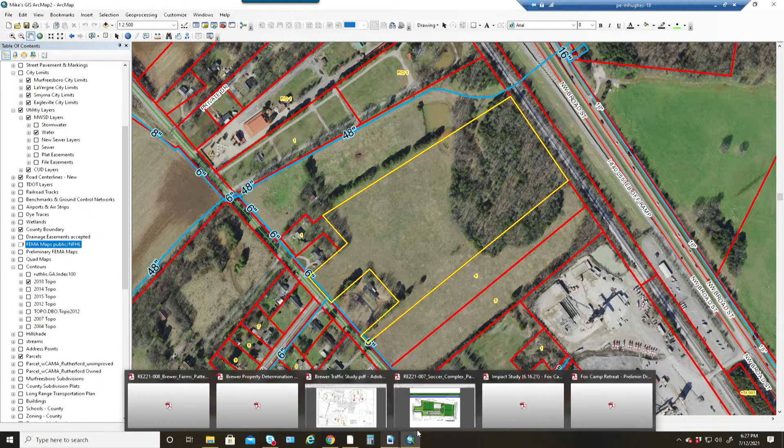The applicant, since that meeting, has shifted the use a little bit more to the northwest. The property is actually broken into several different 5-acre tracts, and instead of taking the two they had originally, they took the one to the northwest along with one of the original ones they were asking for.

So it's actually shifted just a little bit to the northwest versus what they were asking for to the Board of Zoning Appeals back in February of this year. The applicant's pattern book is on your iPads, and the applicant's representative, Mr. Clyde Roundtree, is present to make a presentation on this, but I'll just go over some of the high points.

The soccer club currently operates out of a structure at Oakland High School. The hours of operation will be 10 a.m. to 9 p.m. on weekdays, 8 a.m. to 10 p.m. on weekends during the warmer months. Colder months would entail usage of the indoor facility only, but the operating hours would be the same.

The size of the facility that they're proposing to build would be about 45,000 square feet. That's a little different than what's in your staff report. That's changed a little bit since we got the revisions to the pattern book that is on your iPads right now.

There are 2 outdoor fields. One would be in front of the building. When you look at the concept plan that Mike has up there on the screen, you can see one behind the building as well. The one behind the building is proposed to have lights at some point. The one in front, they're not proposing any lighting on that particular field.

Access to the property would be from Old Nashville Highway. Of course, any new or modified egress points would need to be approved by the county's highway department, and also they'd have to submit a site plan showing that the site met county requirements. No traffic study has been done on this currently. That is something that we can require even prior to site plan.

But you can see they are proposing a dust-free parking area of 92 spots with a grass overflow area of approximately 52 more. We've asked for some information on just the number of seats that would be available inside the facility and outside, and I think Mr. Roundtree is going to discuss that a little more when he comes up here.

Let's see what else we got here. They would be required to install a Type 2 buffer adjacent to any residentially zoned property. This is a PUD, and it's surrounded primarily by commercial zoning. There is some residential zoning along Old Nashville Highway. Mike's going to turn that on. You can see that those portions there weren't part of the original request, obviously, because they're separate pieces of property.

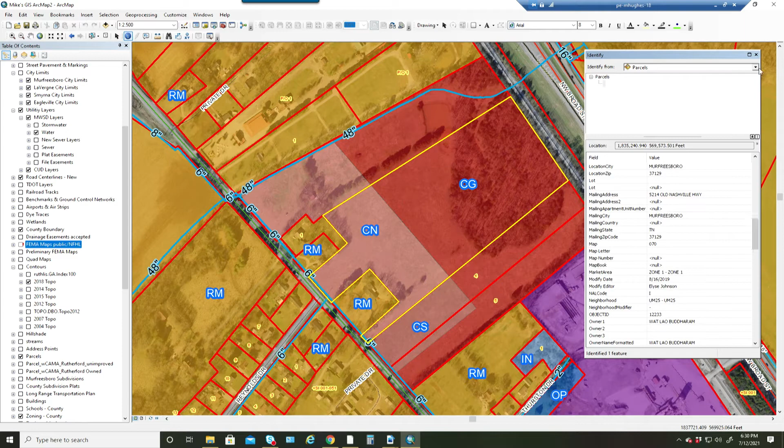But with that, I'll be happy to answer any questions that the commission may have before the public hearing's opened. Any questions for staff at this time?

Applicant available? Applicant here?

Just go ahead and start hitting this.

Chairman Phillips, Commissioners, my name is Clyde Roundtree with Huddleston-Steele Engineering. I'm accompanied by Mr. Ben Livingston, who is the representative for the client, and I believe Jorge is here as well. Thank you, Jorge. Again, my name is Clyde Roundtree, Huddleston-Steele Engineering, and I'd like to thank you for the opportunity to present to you the soccer club located on Old Nashville Highway.

As was mentioned, we originally took this project through to the BZA just to get a special use exception for the property. After going through that process, one of the things that resonated with the BZA was that they were just not confident that if the soccer club was not successful, it would turn into another use. That's where we went into the plan development route, because we realized a plan development provides assurances for adjacent property owners, as well as the county, in knowing what that land will be used for. Mr. Lopez was more than willing to go through that process. He believes this piece of property is really suitable for his business, and he's excited about the possibility.

We'd like to thank Mr. Don Bruce, who's the owner of the property. He's been very flexible. As Doug mentioned, we originally had two parcels to the eastern portion of the property. We shifted to the western portion of the property. That allowed some better access to the property, further away from the adjacent residences, and it just worked out well, and it allowed us to get away from surrounding properties.

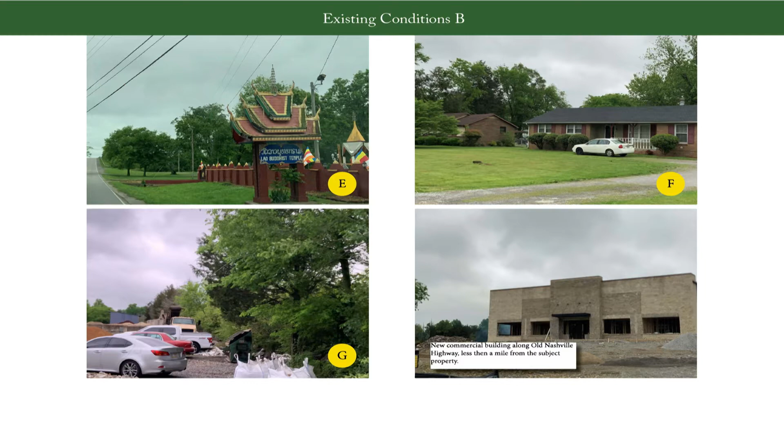From the site plan standpoint, several things have occurred. The driveway now is sandwiched between the properties. Before, it was basically running very close to the adjacent property. We lined it up with the street across from our development, so it's still justified towards the left side, but it is in a wide green space, as well as the signs located in that green space.

As far as the overall development, there's an indoor facility. We justified that against the property line where the temple is, trusting that will provide some buffering from the parking. So any light associated with the parking lots could be buffered from the temple with the building itself.

As far as the front field, a lot of the soccer, basically they flip the field and kids can play on the smaller sides, and they have a lot of different ways of playing soccer on an existing field. So the two fields are outdoor fields with one indoor facility field.

Now, the field in the back, if it prospers at this location, our owner would like to have the ability at this point to have lights approved for the rear field. The reason for the rear field is they don't have that much demand for nighttime soccer, but also to pull it as far away as possible from the existing residences along Old Nashville Highway.

The parking lot design - basically the dust-free parking is closest to the building, but also furthest away from the residences. And there is opportunity where they need overflow parking. We have 92 spaces that are dust-free, and then another 52 spaces for overflow.

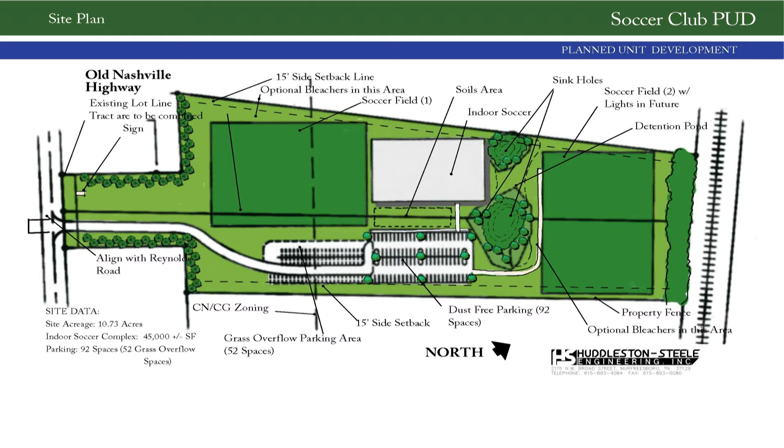The last slide just shows the facility itself. Now, we call it a club because this is a group of people who play soccer together, their families play soccer together. This is not an open-for-public, drive-up kind of facility. Everyone who uses the facility is associated with the facility. It's a pay-per-use type of facility, not a general play where you just come, pick up a ball, and let's go.

It will be a fenced-in facility. For someone to use it, they have to coordinate with the ownership of the property. So we want to make sure it's understood that this is not a public piece of property. This is a private soccer club that's invite-only, a day-use pay kind of facility.

Part of the concern was with any kind of park, what kind of situations will occur - will riffraff come in, all those kinds of questions. This will be a gated facility, only open during times where owners are present. It'll be monitored, it'll be fenced. So all those safeguards are designed to protect the investment of the club's soccer fields, but also to give maximum opportunity to manage the property well.

So with that, Ben, if you'd like to come up and share about the actual use of the property, we'd appreciate that.

Clyde, before you leave, could you talk a little bit about the water and fire protection situation out there we just found out about? Yes, one of the questions that came up was capacity for the water flow of the building, whether we'd have to have a sprinkled building or not, and we'll have to have a sprinkler-based building based on the flows that are available to us. We feel like the fire flow will be sufficient, but it will be a sprinkler building. We just found that out.

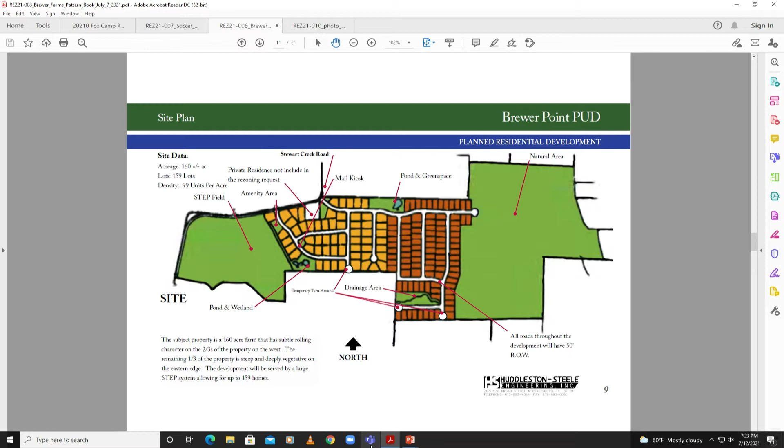Buffering and screening is not required by the zoning ordinance between single-family developments. I believe Mr. Roundtree, when he makes his presentation briefly, will note the revised pattern book does call for a small buffer along one of the sides, but I'll let him discuss that in more detail.

Performance standards would not necessarily apply to this because this is a residential development, not a commercial one. With that being said, this particular application does propose to leave about 38% of this property undeveloped. About 40% of the lot will be the large lots, which are 15,000 square feet, the minimum required in current zoning. The remainder will be just a shade less than that.

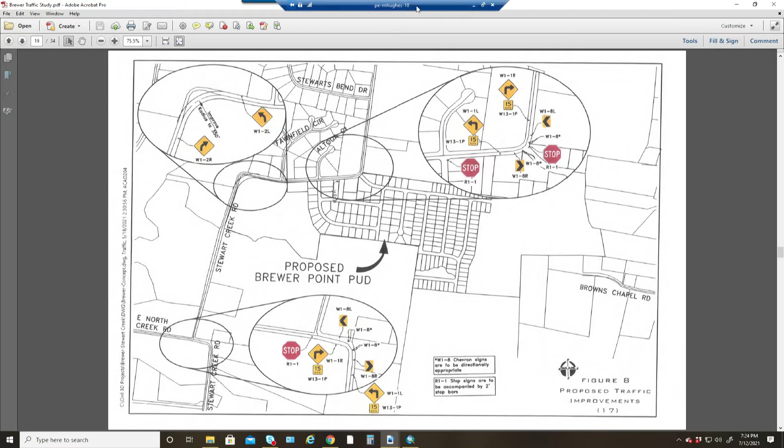No, Doug pretty much covered it. When we met with the design team, we told them we've got some areas we'd like them to look at, and they've looked at each one. The traffic study, even though it didn't say it needed a turn lane on the westernmost entrance, they're proposing to add one at that location. So you would have left turn lanes for the development, but also to Altoga Court, if I'm saying that correctly.

Only other thing I'd point out is there are a couple lots just a little bit east of the westernmost entrance that are fronting Stewart's Creek Road, and anytime we can eliminate potential connection points is a good thing. So I would ask if they could maybe move those to the inside of the development, maybe close to this pond and green space area, moving those off the main thoroughfare out there.

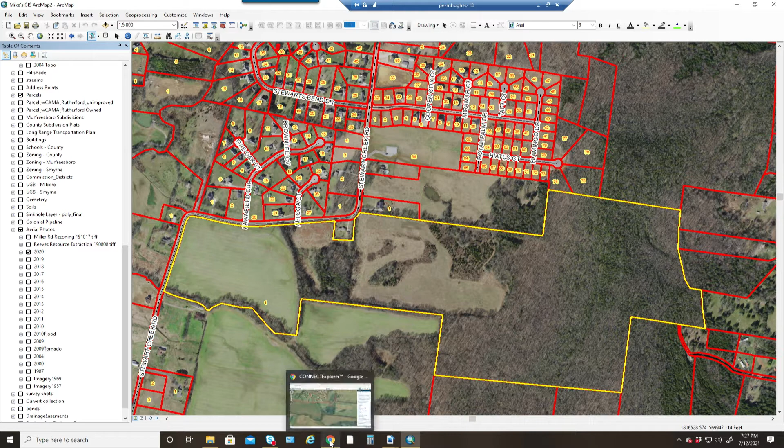But all in all, with the large lots up front, the layout, and preserving the steep areas on the eastern end, that field will pretty much stay a field from here on out once the STEP system is constructed. We will see a preliminary plan, we'll see construction drawings, so there's a lot of steps involved after, if and when it does proceed to this body.

Any questions for staff at this time? The applicant is here.

Chairman Phillips, Commissioners, my name is Clyde Roundtree with Huddleston-Steele Engineering. I'd like to thank you for the opportunity to present to you Brewer Point Subdivision. As Mike has mentioned, there have been several generations of this master plan already, and we've had active involvement from the neighbors through a neighborhood meeting, so we did our best to respond with this new revised pattern book, but I'm sure the neighbors are here to help us get some direction there. With that in mind, I'm accompanied by Steve Steele, the engineer on the project, and also Mr. Dan Bobo, representing Old South Homes, who is here as well.

Brewer Point Subdivision—we all know that as development trends occur in Rutherford County, 15,000 square foot lots are becoming an anomaly, 10,000 square foot lots become an anomaly, and a lot of lots are going towards 6,000 square feet for more density, just to reduce overall development cost. So we represent this project proudly because we feel it is a development that is sensitive to the surrounding neighbors, since it is in the country, in a rural area. However, the fact that the STEP system, in a sense, forces a development community to have green space associated with this project—again, it's not usable green space, but it's green space. As a designer, I feel really good that when they look out their front doors and when they come off their main roads into this area, they're pretty much going to see what they've seen for many, many years.

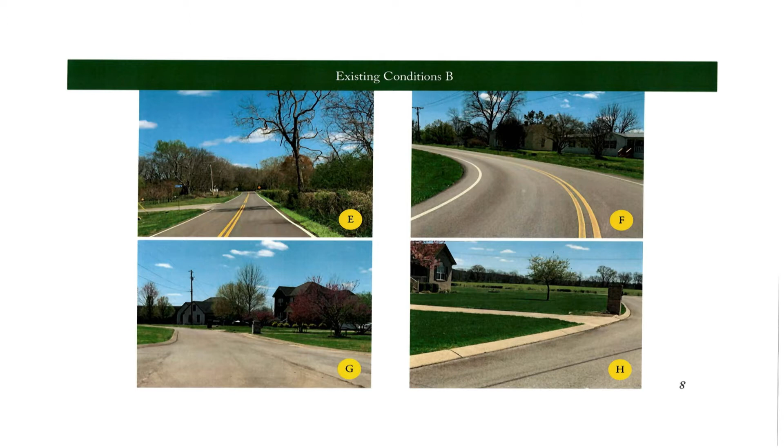This just shows you the nature of Stewart Creek Road around our location, and then some of the adjacent neighbors' homes on the lower slides.

Overall, the development has the larger homes at the front entrance, multiple green spaces throughout, and an amenity center within the development. The STEP field will provide green space, 66 acres preserved for natural space.

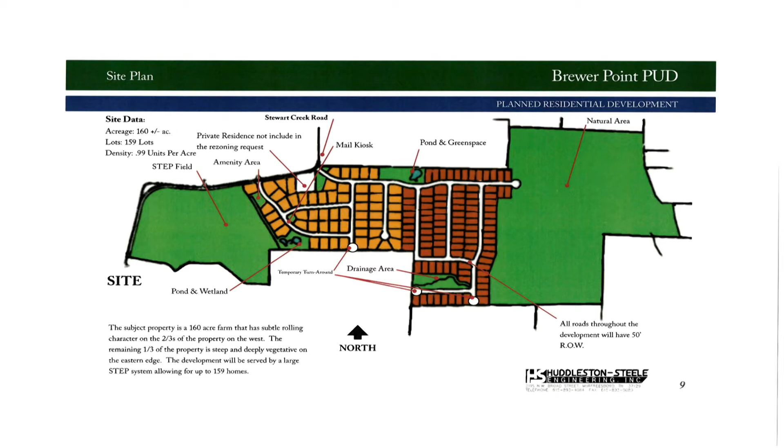So we're developing the prime area in the center of the property. About 60 to 70 acres in the center will be developed.

I want to show you this slide because it was important. We know the county's under some pressure. We had a meeting involving planned developments in terms of lot sizes and lot widths, and Mr. Bobo was more than willing to work with us on trying to make the lots as wide as we could within reason.

So they went from 60 feet to 75 feet, which makes CD happy as well. We made the lots wider, we made the lots deeper. What we're finding is that the shallower lots in a lot of these developments really provide no backyard for a lot of the residents.

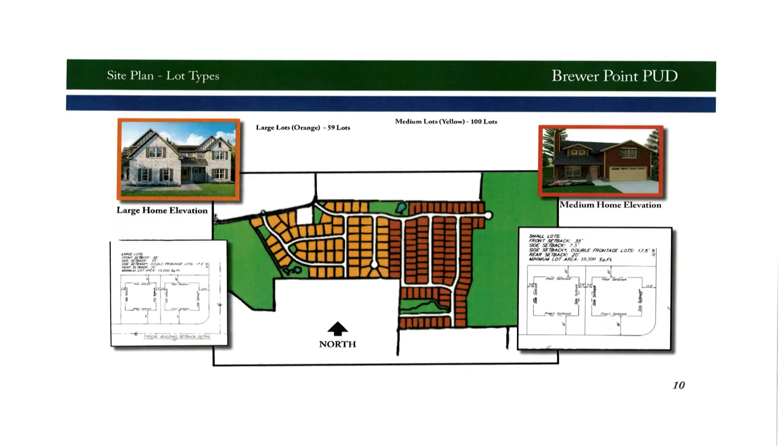So we're being encouraged as a development community to make the lots deeper, and Old South has responded with a willingness to do that. The smaller lots are now 75 feet by about 140, and the larger lots are 150 feet deep with 100 foot width. All things considered in today's economy, these are actually large lots.

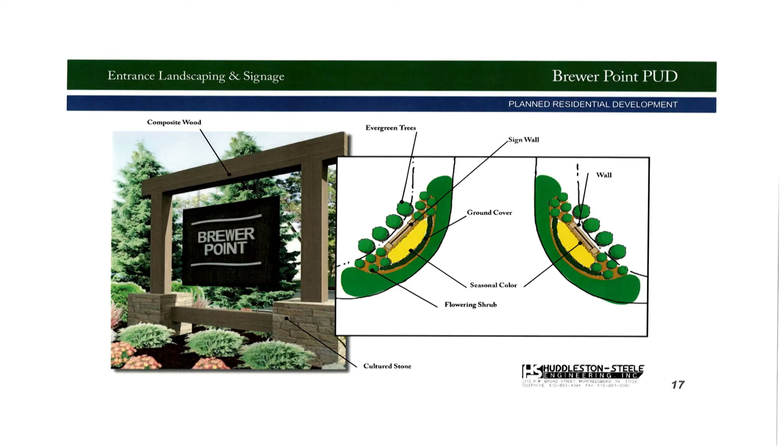It'll have a nice entrance that'll identify Brewer Point off of Stewart's Creek Road. As we're seeing with all of our developments, green space is a requirement, amenity centers are a requirement. This will have a playground as well as a pavilion, so we feel like we're meeting the needs of the neighbors, with multiple green spaces leveraged with drainage as well.

A lot of the neighbors had concern over drainage. Mr. Steve Steele is here to talk about the drainage component as well as the traffic component. But in response to the neighbors' concerns, we reduced the quantity of homes as a gesture that we are willing to back down the density, even though we're already less than 1 unit per acre.

We're also willing to increase the size. Originally we had 7,500 square foot lots as our smaller lots; we went up to 10,500 square feet in response to the neighbors' concerns. We feel like at this point we've made concessions to try to make this development as palatable as possible for the adjacent community, realizing that growth is growth.

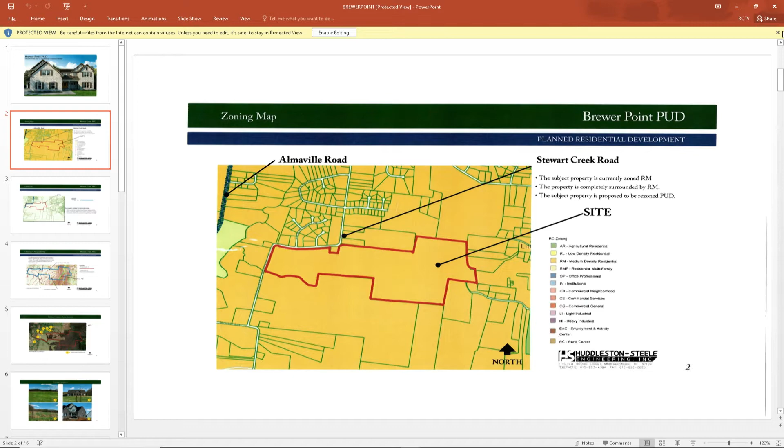Most people would rather see a pasture than a subdivision, but we do feel like what we're proposing is comparable, if not at least to the standard of the homes adjacent to it. We feel there'll be no negative impact on property value with the adjacent homeowners. As for traffic, we've added turn lanes that'll help keep the flow on Stewart Creek fluid.

But with that in mind, I'm talking a little out of my turn. Steve, if you can come up and walk through the traffic component and the drainage component, I'd appreciate your time.

While Steve's coming up, could you address parking, the HOA restrictions as far as parking, street parking, that kind of thing? Yes, sir. We have 35-foot setbacks on the lots, so that'll provide for a 2-car garage with ample parking for 4 cars. We added that diagram to the large lot and the small lot, so all the lots will accommodate at least 4 cars in the front of the house, so we don't think on-street parking will be any concern. Thank you.

Mr. Chairman, members of the Commission, I'm Steve Steele with Huddleston Steele Engineering. Thank you for giving me the time to speak. I know we have a lot of people here that want to speak too, so I'll try to keep my comments short and sweet, if you will.

As far as traffic, our traffic study was done by Bill Huddleston. Bill has a master's degree in transportation engineering from Vanderbilt University, and has done many traffic studies in this county over many years. Our developer has committed to adopting all of the recommendations that were in the traffic study. In addition, even though it wasn't a recommendation of the traffic study, there had been talk of needing turn lanes, and our developer, Old South Development, has committed to doing that. So that's kind of the overview of that.

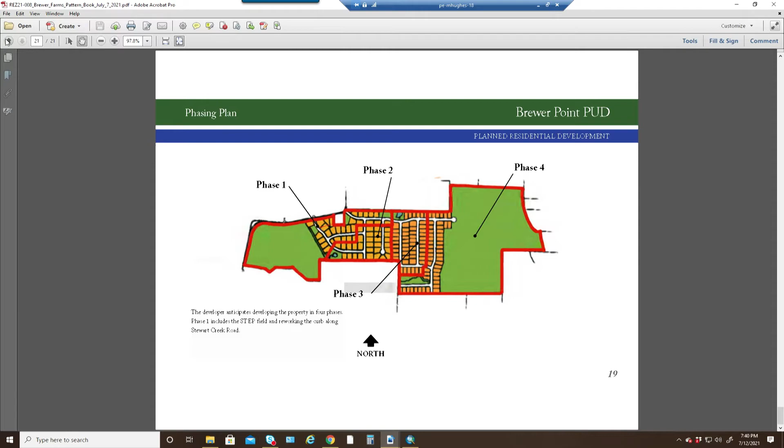Other questions? Thanks, Steve. Thank you. Any questions for staff before we get to our public hearing?

Mr. Chairman, I have one question for Doug. The steep topography on this land that's labeled as natural area, if you excluded that and you really just considered buildable lots without a rezoning, how many lots are we talking about this area would yield?

They are proposing right around, I believe I heard Clyde say, around 66 acres or so for the houses. Of course, they're getting about 160. If you took their layout and you added 5,000 square foot to some of those lots, of course, they wouldn't get what they're getting right now. It'd probably be closer to somewhere around 125-ish. That's just kind of off the top of my head in that range.

In a perfect world, the RM allows for, again, 15,000 square foot lots, but you would be looking at roughly 3 units an acre. 2.9 is what the calculation actually equals out to. But that's, again, in a perfect world, which you're never going to get that. So what they are proposing is more than what you would normally see in an RM subdivision, but I don't think it's a lot more than what you would normally get.

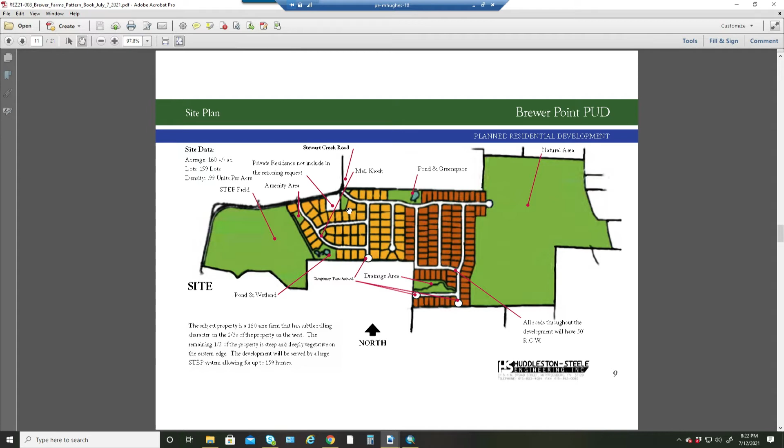We did ask them to make some improvements at this awkward intersection here, at North Creek Road, where there's two 90-degree turns right there, and they are proposing to improve that with some signage and stop signs, chevrons around the corners.

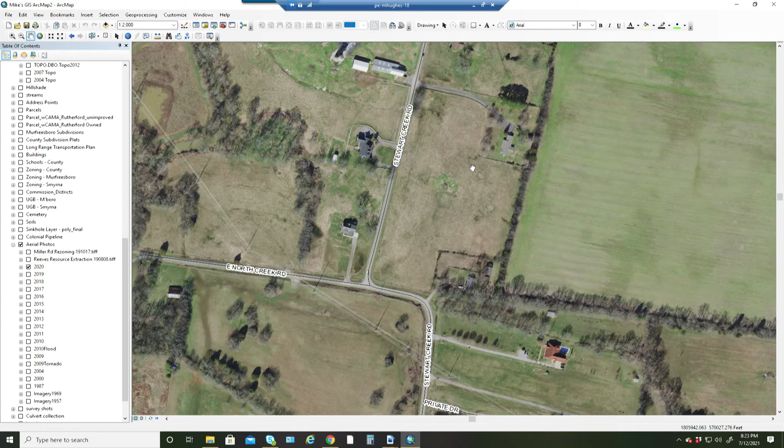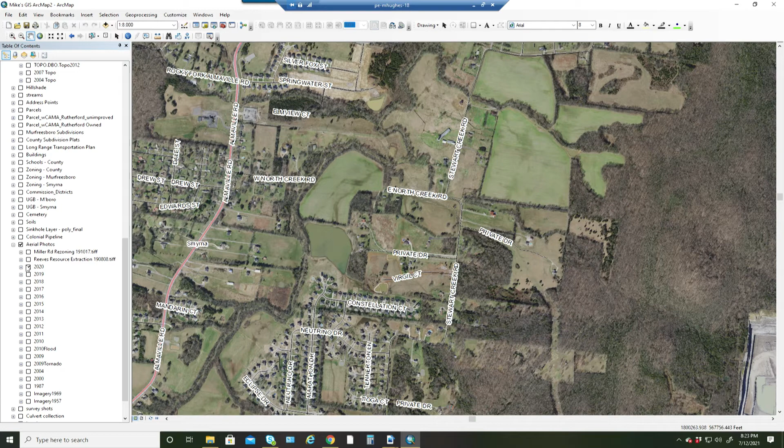Why don't you come up and talk to us if you'd like? Well, I can tell you right there in that curve.

Okay, so if you go look at that curve around East North Creek, right there, they've put up signage. They put up signage several years ago because the farmer, Brewer, was tired of replacing his fence posts from people every Friday night or Saturday night running off the road into his field. So they finally put signage up. We still have to help people out on several occasions, still going around that curve, even with the signage.

This other side where it goes Stewart Creek at the corner of East North Creek, we've had two dump trucks fall off the edge, okay, because there is no side of the road there. And you're looking at a good 4-foot ditch to where, as a walker, if I had to escape that road, I am going to hurt myself jumping into those ditches.

So as you see there, as you have it right here, when that grass and the tree line grows up, you cannot see around there. As you see where that comes around that field right there, if you go look at that field, the fence line is gone, where people have not been able to make that curve. Those are some serious curves, people, with no visibility.

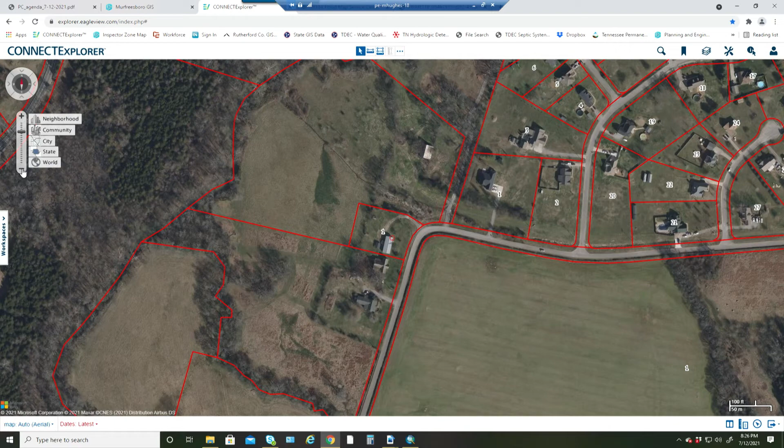So that's what I'm saying. You've got 5 90-degree turns like this in this road. Each one of them is very difficult for even a normal car to drive. And now with the construction people coming in and out of Pembroke, we're finding I've actually stopped even when the trucks are coming around because they don't know how to stay in their own lane because the road's too narrow. So it is dangerous. Somebody's going to die on this road.

You're adding all of these higher density houses here without doing something. And I don't think any one of us want to have that. I know I don't. Because it's going to be one of my neighbors or myself. Thank you.

Mike, anything else? No, I mean, a lot of it is speed control. We can request the sheriff department do a speed study through here, maybe possibly lower the speed limit down, lower than what it is. But, exactly. Okay.

The public hearing is closed. Mike, anything else? No, sir.

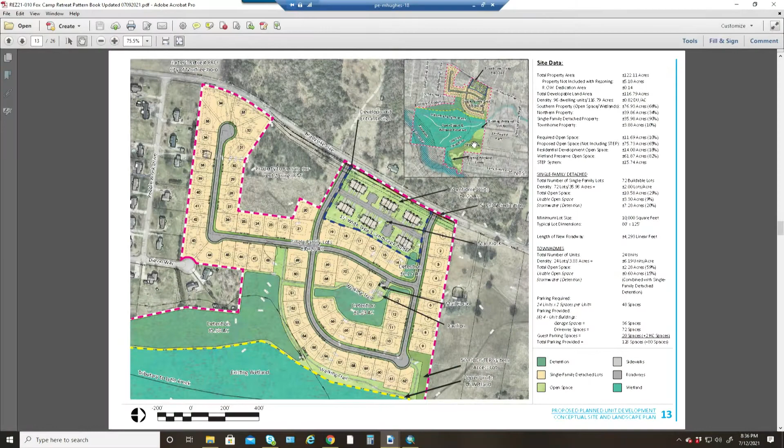This particular sheet doesn't show it quite as well, but to the south, still part of the same property, there are a couple of streets that will have potential access points to the STEP soils area, either Singleton Drive or Lytle Creek Drive, which is on the eastern side of the property. I don't think that decision's really been made yet as far as which one.

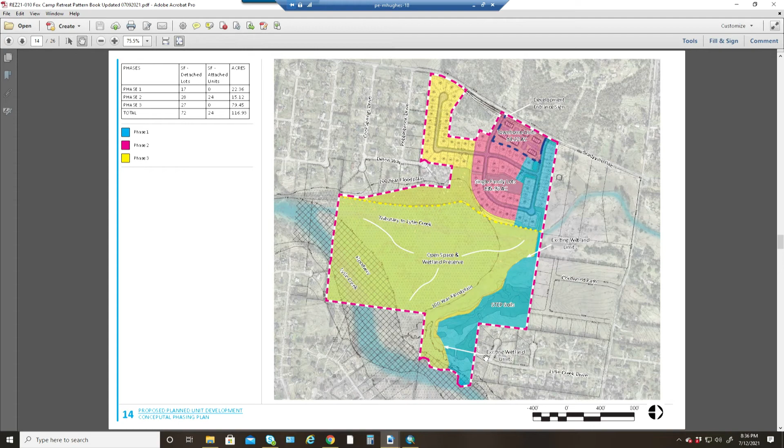That's only for access to the STEP area, not for access to the residential development. There won't be cars going through there or anything, just a STEP access area. The applicant did submit a traffic study with their proposal, which we included the recommendations of with your agenda packets. Turn lanes were not recommended as part of that particular traffic study.

Buffering and landscaping is typically not required by the zoning ordinance between single-family developments. The applicant is proposing a type 1 buffer between the attached and detached products in the development, as well as an enhanced buffer along Bradyville Pike to screen the rear of the attached dwellings.

There is additional information in the pattern book, but this project will be dedicating over 75 acres, which is 65% of the property, to open space and wetland preservation. As you can see, there's a large area that Mike is highlighting, really not area that's appropriate for development, so that's being completely set aside and will not be disturbed by any of the development.

Performance standards would not be required to be met just because this is a residential development. Similar to the last development, these lots are larger than we've been seeing for typical PUD lots. Mr. Roundtree did make mention of the meeting that we had. Mr. Taylor, who's here with SEC, we've also spoken to him about this, so they're hearing what we're saying about these developments.

Mike's put up the architectural characteristics for the detached, and there's one for the attached units as well. With that, I know they have a presentation they'd like to make, so I'll be happy to answer any questions you may have.

They're also going to, like Matt said, have 3 detention ponds. Our maps seem to be locking up again. They're going to have 3 ponds.

This is the area he was talking about. Mr. Kite has had a lot of issues with drainage problems. This is his septic system in the front yard. It is essentially in a bowl and doesn't drain anywhere. So in heavy rain events he's got water standing in this area, and I think it even crosses his driveway. But his house is built on high ground and is usually protected.

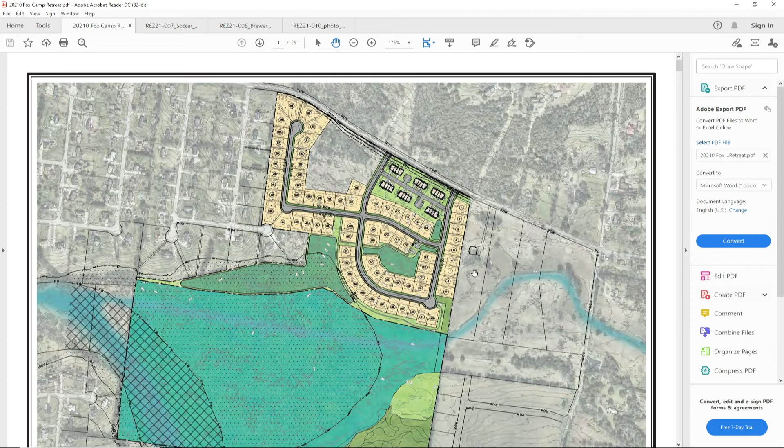I haven't heard of any water getting into his house, but what they're going to propose is 3 interlinked ponds. Even though this area is going to be preserved for wetlands, I believe they're going to try to excavate some depth coming out here to allow this drainage to flow out in this westerly direction going towards Lytle Creek, and then also help, if they can, this adjacent property here. But this area is extremely flat.

This area right now is showing 100-year floodplain. FEMA has recently reevaluated that area, and I believe a lot of that's going to be removed, but it won't change the fact that it'll still stay a wetland, so it won't be developed.

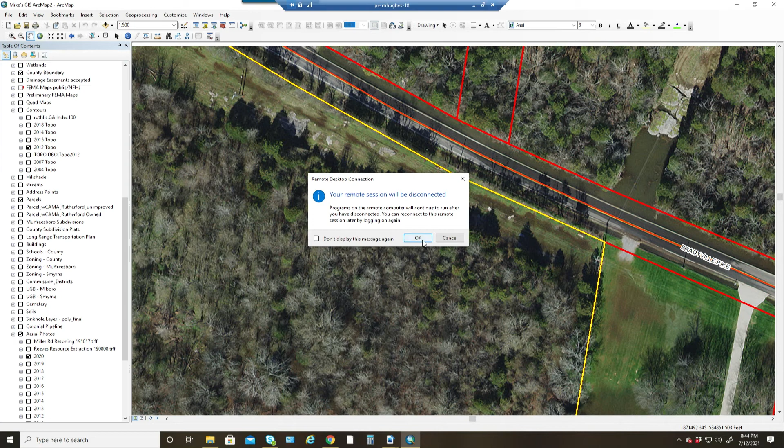Traffic, their study did say, even with the anticipated growth, they assumed an additional 20% in the mornings and 30% in the afternoons over their timeline, to offset the loss of counts during the pandemic. So they've buffered their numbers up, but they still have level of service B for these at the existing Bradyville Pike entrances. So they're not recommending improvements right now.

Say that again, no turning lanes? No turn lanes, I believe, is what they're proposing at this time. Matt, were you going to have a dedicated right out and left out? Don't recall remembering what that was proposed at those entrances. I don't think we'd gotten quite that granular, but basically all of our entrances into our developments have, I think, a dedicated left and right out, and then an in.

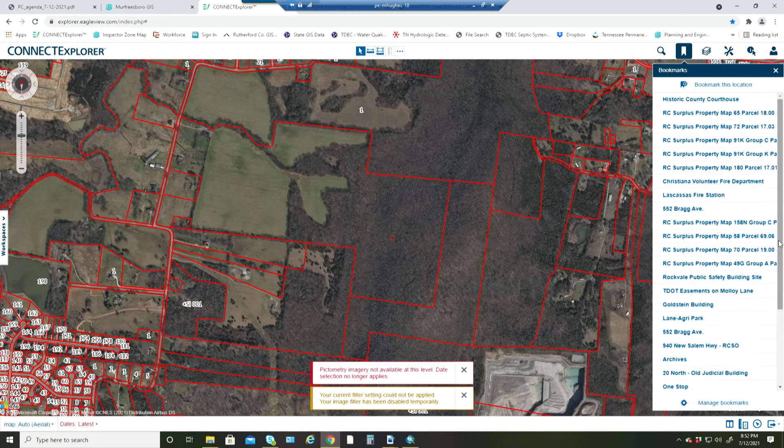In 2008, when we moved in, this wasn't really a problem, but the land has eroded greatly. Now there's no ditch in front of our house, so I've taken measures and started digging a ditch myself. We contacted Public Works.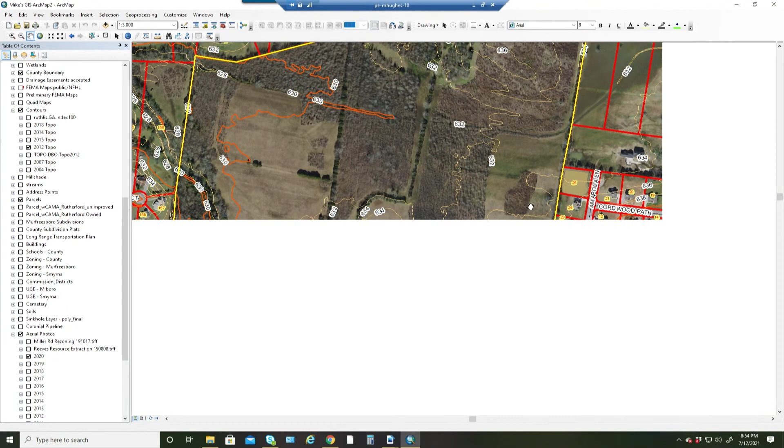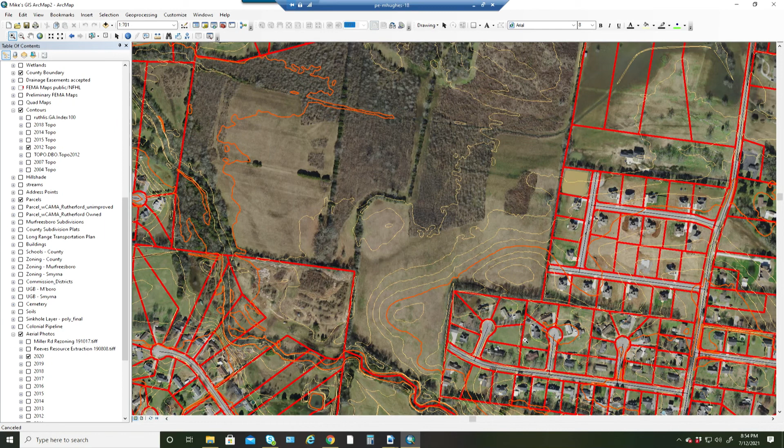Now, after listening to Mr. DeMosi and Mr. Hughes and the developer talk, the person on Bradyville Pike that has a little bit of water in the front yard is allowed a drain pipe to drain that water out into the development. I've seen that house a million times. I've been there 13 years, and a little bit of water in the front yard is a small price to pay compared to our crawl space flooding every single time there's a heavy rain.

I would be very happy, my family would be very happy, for a ditch to be allowed to be dug into this property that is flowing into a wetlands. It seems like that would help the wetlands grow.

And if the plan right now for the drainage to come south from the PUD goes forward, I'm afraid that water's going to keep coming into my property.

You see the tree line there, my house is there, number 33. That tree line, stormwater runs down that fence line, and the flood we had earlier this year was coming into my backyard. That land has eroded away in the past 13 years. At the time it was built, it maybe would have been sufficient, but now it's all eroded away and it's almost flat.

My concern is that the development and the stormwater from that development headed to the wetlands is going to deteriorate the ground even more, erode it, and cause damage to our house to where we cannot live in it. After hearing the plans of the drain pipe for that individual's property, I would like the plans to be deferred until a ditch or a drain pipe is allowed to be put in for my property into the wetlands area.

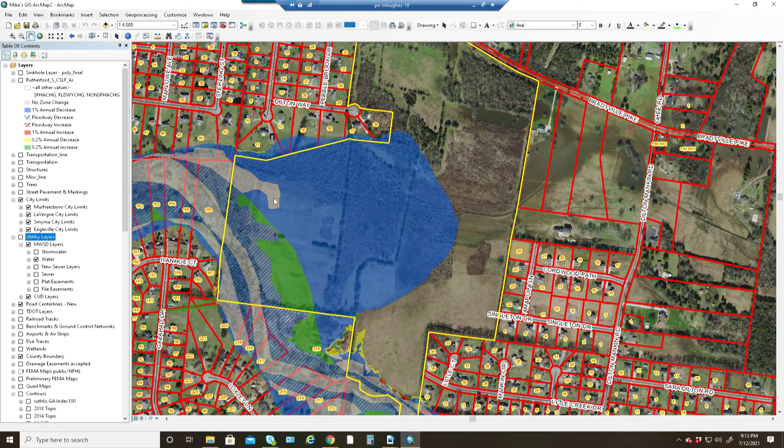And if I can get my computer to work without locking up, let me show you what I was talking about. This is the changes since the last FIRM map. Cross your fingers and hope it works. Okay, the blue area is what they're removing from the floodplain. It's all in this wetlands area, so it's not going to impact the development one way or the other. But they've restudied Lytle Creek in these areas and think this needs to be removed from the floodplain. Being so flat though, getting this to drain out is going to be a challenge.

You can see where a farmer has dug a drainage swale through here, all the way from Dilton Mankin, going in and tying into Lytle Creek. But when we originally looked at Mr. Kite's property, trying to find a way out, it was about 0.2% grade - almost as flat as a tabletop, maybe flat as a tabletop. So that's something that's going to be tough to overcome, that flat elevation.

But they think they can make the outfall of this pond work, with a little work in the wetlands, gaining some elevation to help it drain off and get it from Bradyville Pike through their development and out this western edge. So in theory, they think it can work. We'll have to look at the construction plans to ensure that it will.

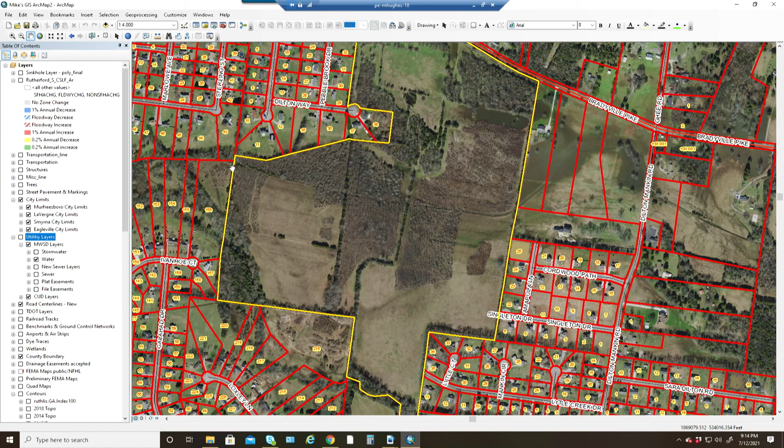That's what you'll be looking for at the site plan? Yes, sir. So everything will be looked at once again through the site plan as well as the final plan.

I enjoy bleeding all over Matt's plans with the red markups. So, yes, sir, that's one of my hobbies.

Mr. Chairman, I'd like to make the motion to approve the applicant's request, subject to staff comments. Thank you, and their watchful eye.

We have a motion to approve and a second to approve REC 21-010, Joe Swanson Jr. Any other questions or comments? All those in favor of the motion to approve, please say aye. Any opposition? Motion to approve carries.

Let me make one particular comment before you guys leave. You're not experiencing something that hundreds of other Rutherford County residents haven't experienced, and it's been the goal of this Planning Commission and county government to improve the handling and flowing of water for the last 20 to 25 years. We're getting better at it. And let me also say that Joe Swanson, the Rutherford County resident, not only a developer, but a Rutherford County resident, and we've never known him to not do things that are in the long-term best interest of this county.